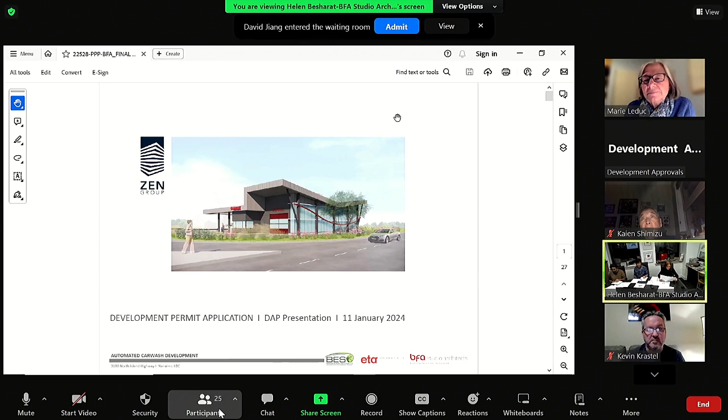Thank you. Could you share the screen, please? I'm going to start by introduction of our team. Chatan Manchatta is the development manager with Zen Group. Christiane Dufer is the landscape architect, she will be going through the landscaping concept. Jacob Pez is the civil engineer and site traffic management. Together with mechanical electrical consultants from BES, Ruben and David, and Nadine King and Christine Machin are with Watt Consulting, transportation engineers. Other than Christine and I, who are the presenters, other engineers and team members are here to answer any questions that the panel may have.

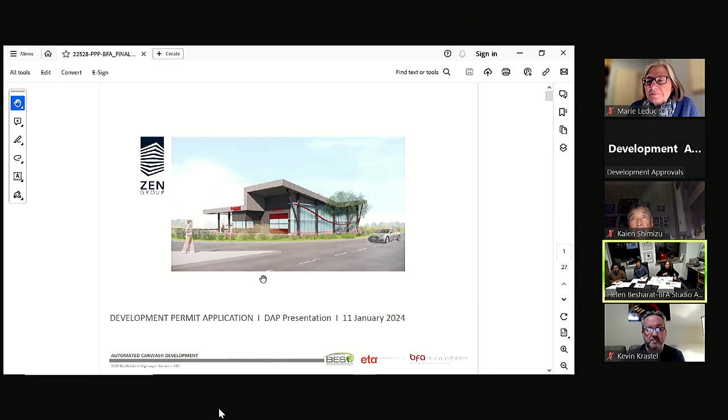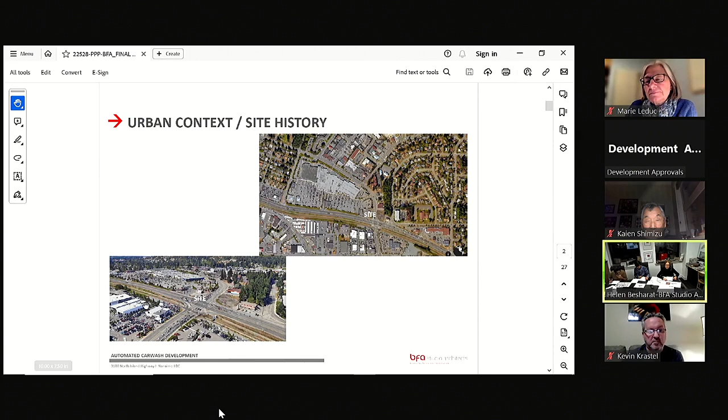Thank you for this opportunity, and thank you, Peyton, for your introduction. The site is located at the intersection of Island Highway and Norwell Drive, a visible site. You can see it now three-dimensionally. Right to the north is a large mall, and to the east and west, the site is surrounded by dominantly industrial buildings. This is from above, and this is the 3D. You can see the site, which is empty, and there used to be a gas station on this site many years ago that's since been demolished. You can see the existing industrial buildings to the south.

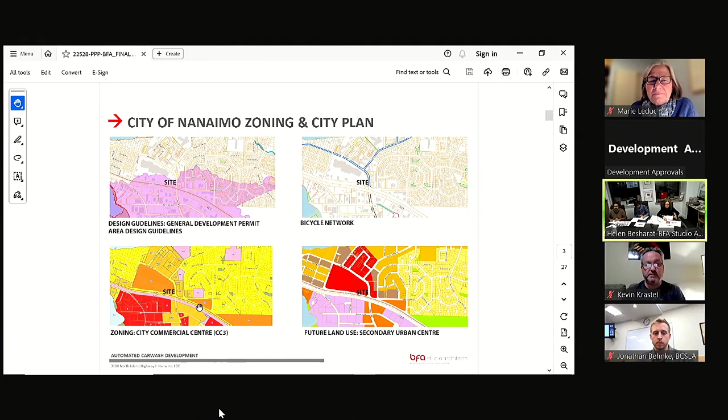As Peyton mentioned, the project is under development permit areas 4 and 8. It's zoned CC3, and the future land use is secondary urban center. You can see the site location indicated on these four images. Back to urban context, most of the surrounding buildings are industrial, except for the north, and to the south mostly car dealerships, and most of the time single story with a high ceiling or double story, two-story high.

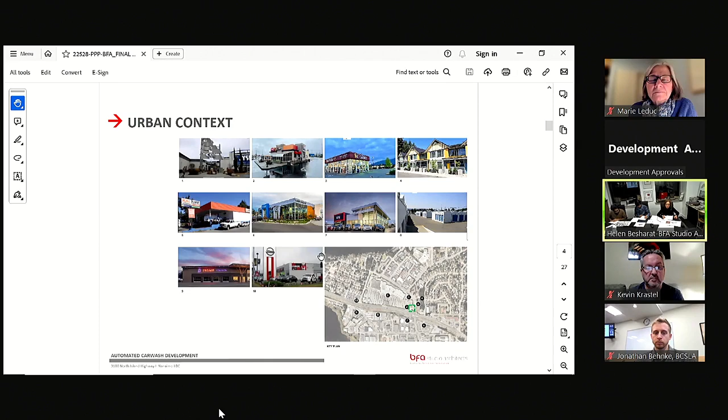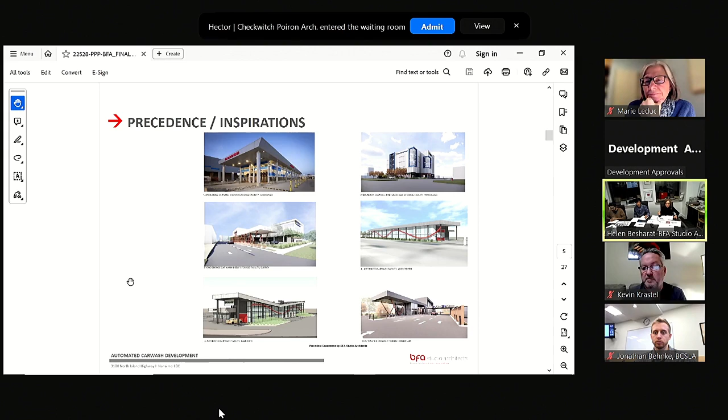The precedents and inspirations are actually from our industrial portfolio. We have been involved with industrial projects for the last 25 years, and the inspiration we have designed and learned from car wash projects, both urban and suburban and everything in between, trying to learn and improve.

The site is 1,444 square meters. The proposal is a 2-story building. The density is 362 square meters, 0.25. Allowed site coverage is 50%, but proposed site coverage is below allowed at 28%. And the use is industrial F3 occupancy based on BC Building Code.

With respect to the immediate west, the Dairy Queen shares 2 access points with the proposal. The vehicular access is from the northeast at Norwell Drive. You can see the green arrows, 2-way accessing the site. From Island Highway it's right in, right out. Again, the green arrows; orange indicates the circulation of

cars inside the site, which is cars will arrive at this point. There are 2 lanes; they arrive, they go through the pay station. After the pay station, the 2-lane merges to a single lane. The cars carry on, go through the tunnel, exit, and go up or down to get back to

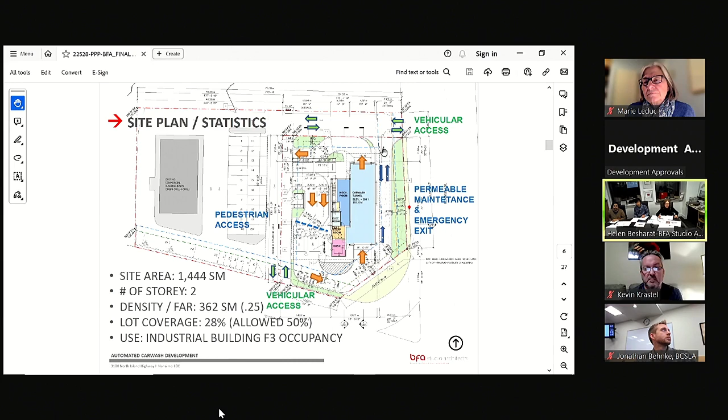We are providing tandem parking in this location. But because this area with permeable paving is usually empty, there is also a possibility for staff to park in this area.

We are proposing two variances. The first one is limited to the red triangle that you see in this area. The reason for that is we wanted to keep the continuity of the weather protection canopy at the entry to the car wash tunnel.

The second one: there is a requirement to provide about 5 to 6 feet of landscaping buffer. Rather than landscaping this area, we are providing a lot more landscape space on the MOT site, approved by Ministry of Transportation. So you can see we are providing almost 3 times more landscaping area, because we needed to keep this area open for maneuvering and ease of entry to the tunnel. We feel that because of this corner MOT site, the proposed 2 variances will have a positive impact on the proposal.

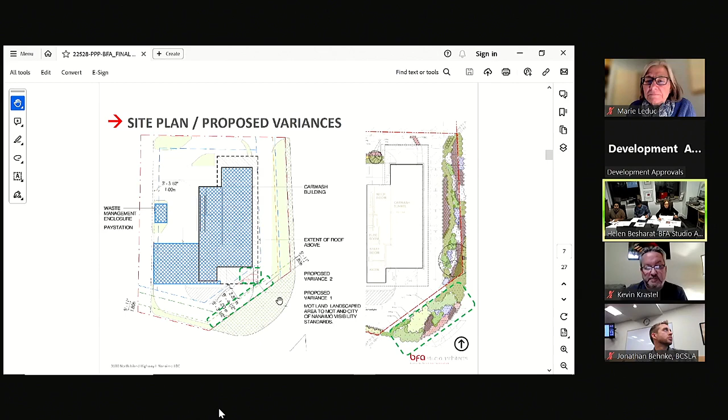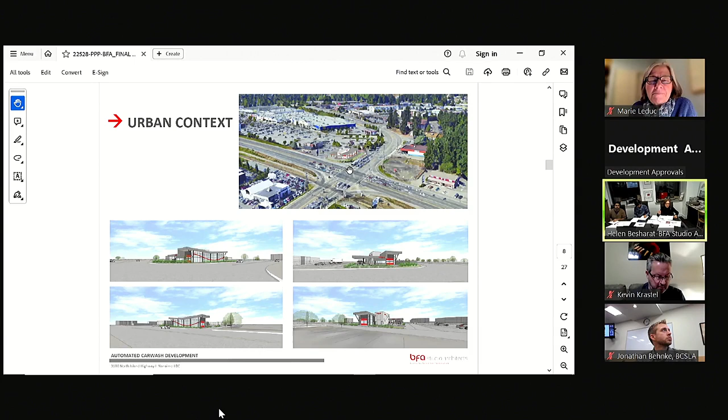Here we are showing the building 3-dimensionally in urban context. If you compare the building, you will see that it's an important site because it's at an intersection demanding special attention at the public realm. You can see that relative to other buildings around, it's a small volume, a small building.

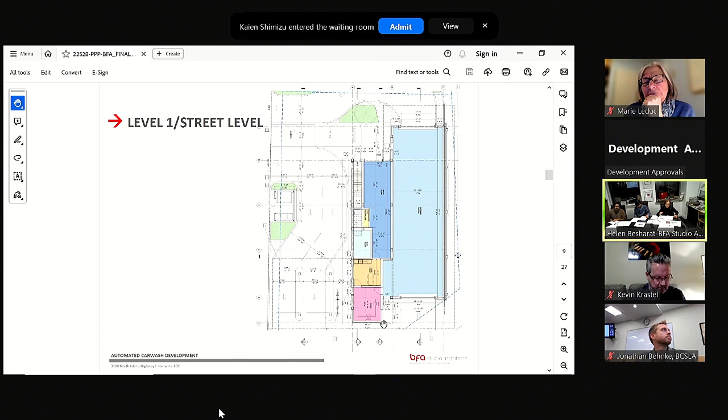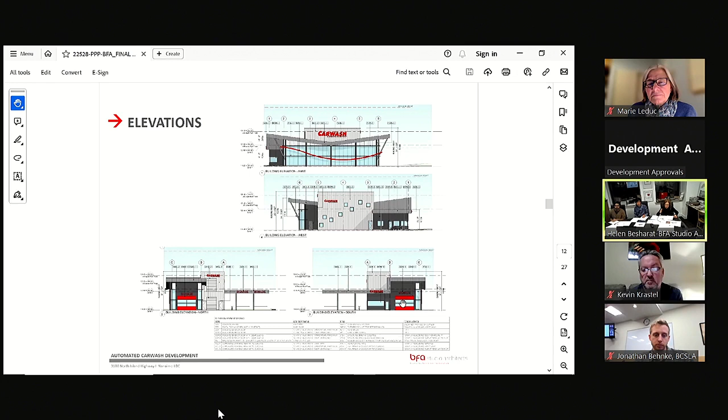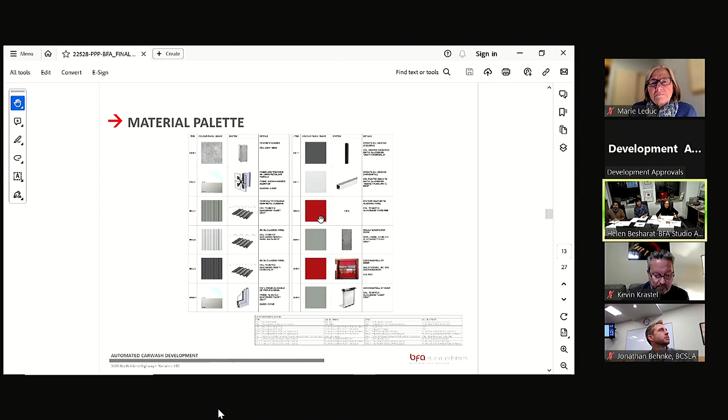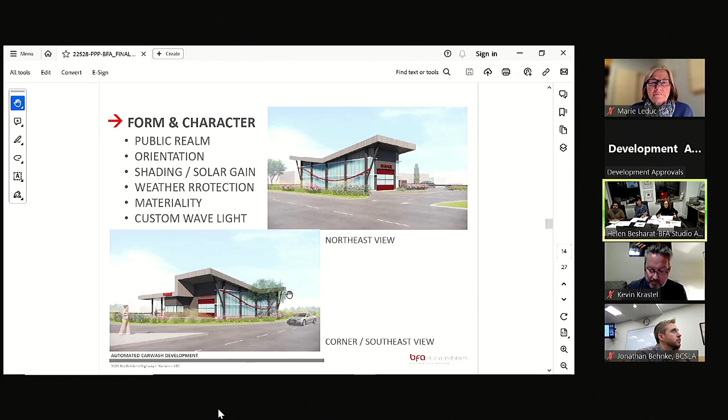And I went through the materiality, and we have also designed a custom wave with a custom light that's going to be lit at night. And it's kind of—it's a wave.

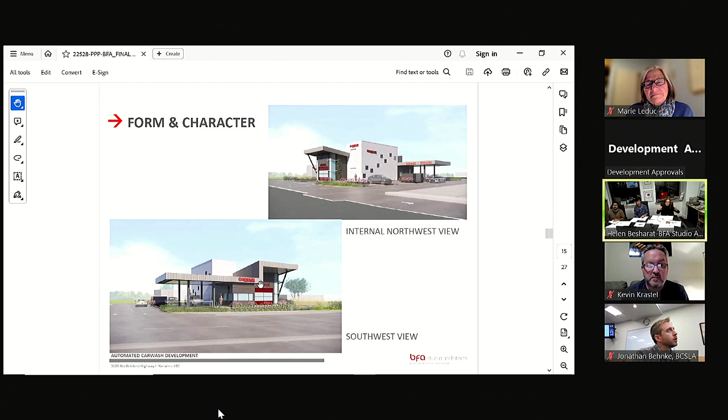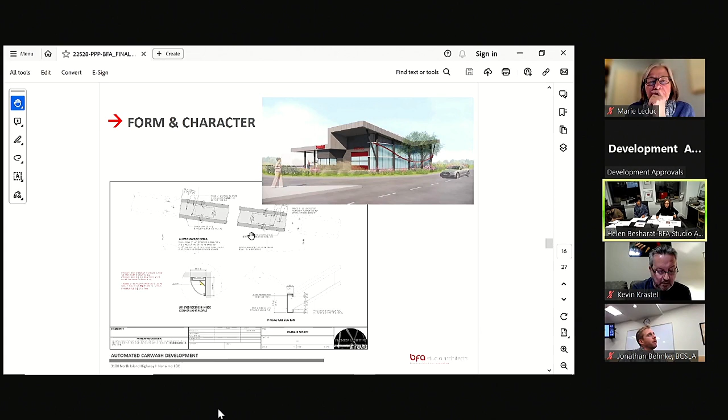The building has a number of sustainability aspects. The most important one is the use of recycled water rather than wasting untreated water at individual homes or businesses. The water gets recycled and reused.

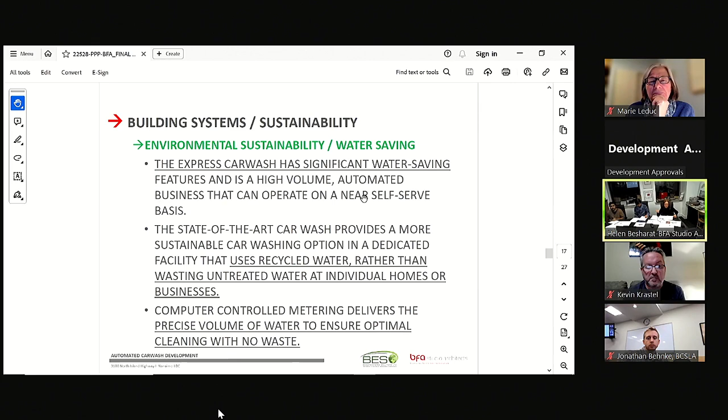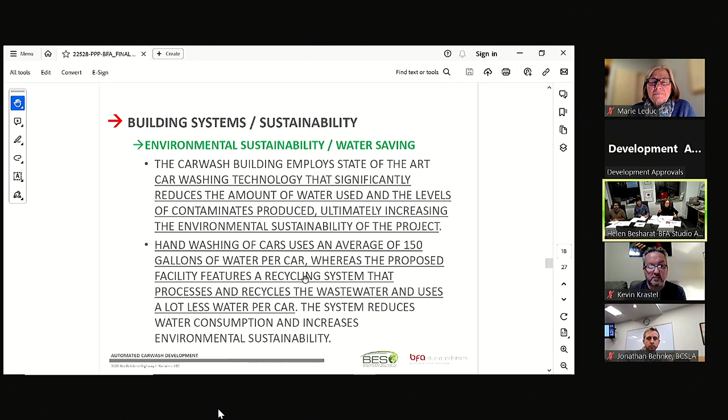The car wash building employs state-of-the-art car wash technology and significantly reduces the amount of water used and the levels of contaminants produced, ultimately increasing the environmental sustainability of the project. Hand washing takes 150 gallons; the use of water in this building is a lot less. Most of the water used in the car wash is reclaimed water, with only fresh water used during the last rinse to avoid any drying spots.

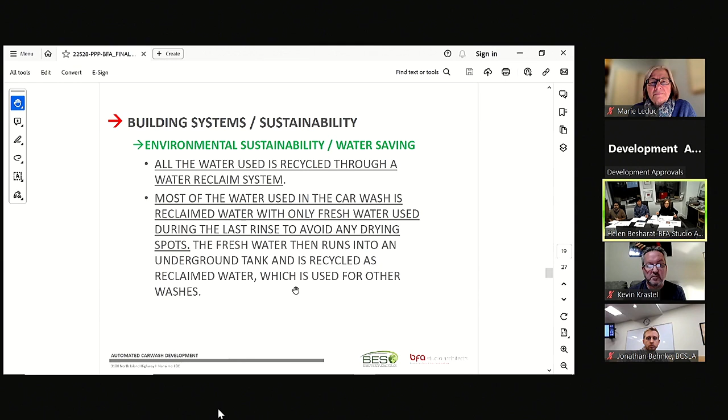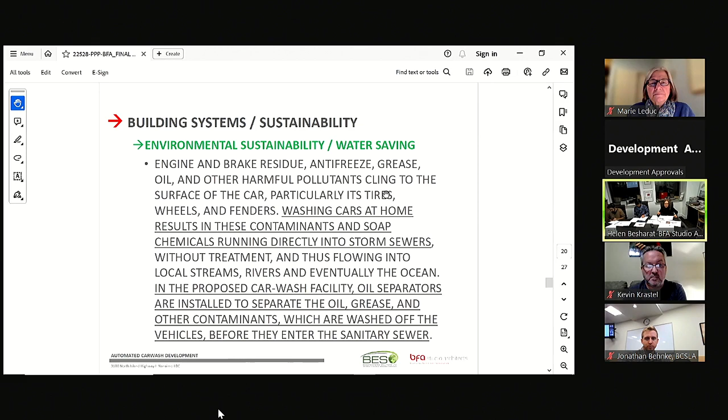Another environmental aspect of the project is that the car wash facility's oil separators are installed to separate the oil, grease, and other contaminants which are washed off the vehicle before they enter the sewer system.

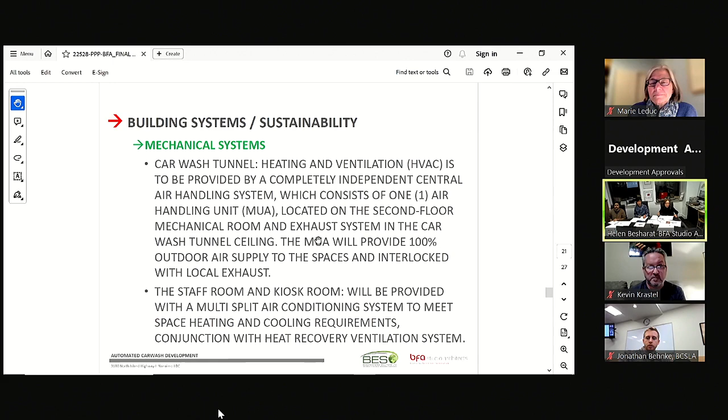I'm not going to go through the details of mechanical and electrical sustainability — they are mainstream. The biggest items are separating the oils and also the use of water, which are the highlights of sustainability. BES, our mechanical and electrical engineer, has prepared detailed information on every room, and they are present if you have any questions — they will be here to answer them.

LED lighting fixtures are used. Occupancy sensors are used where permitted, and the infrastructure for the EV charging stations will be installed in both parking stalls.

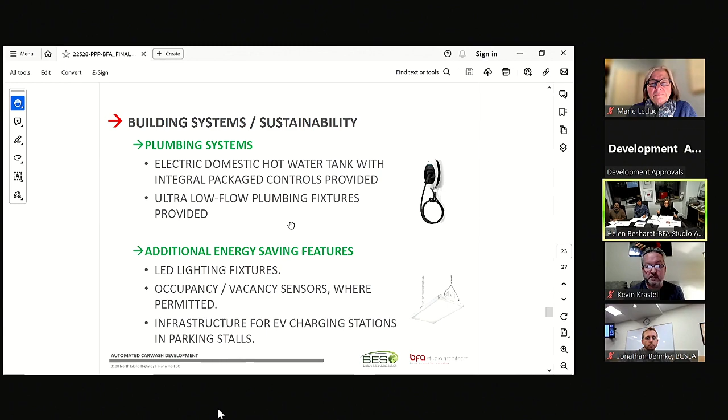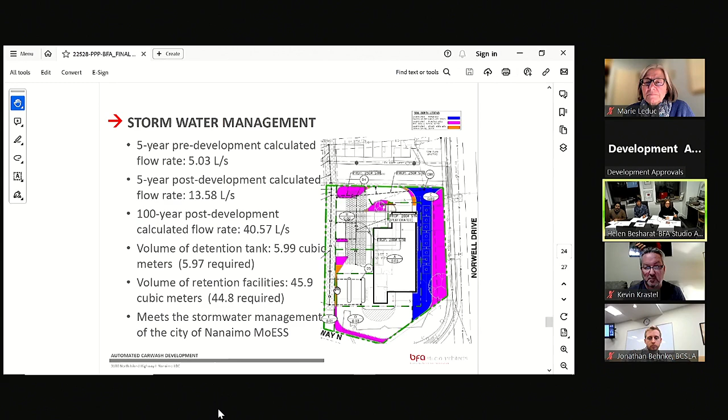This is a stormwater management drawing prepared by Jacob Pence of Appleton Martin. The magenta color is landscaping with approximately 450 millimeters of soil. Dark blue is permeable paving. There is also some stormwater underground tanks in this area, and the small amount of orange is gravel.

With this, I'm going to ask our landscape architect, Jonathan Behnke, to carry on with the landscape presentation. Thank you, Helen. I'll just ask you when I need to go to the next slide — there's only two, so it should be pretty easy. The landscape design is pretty straightforward.

I think Helen did a really good job of covering all the sustainability initiatives we're trying to achieve. With the landscape, we want to maximize the permeable area on the site while also providing a strong green buffer between the street and what is visible, to shield the appearance of the cars while still allowing the building to be highlighted. In this plan, you can see that large buffer between the drive aisle and the offsite area, as well as the offsite area we're hoping to plant — see the sections for how wide those planted areas are.

The hatched space on site, as Helen mentioned, will be permeable paving, bringing in more porous spaces for stormwater throughout the whole site. Areas that aren't feasible to plant, whether too skinny or undercover, will be permeable gravel so it's not just a solid hard surface. I think we can go to the next sheet now.

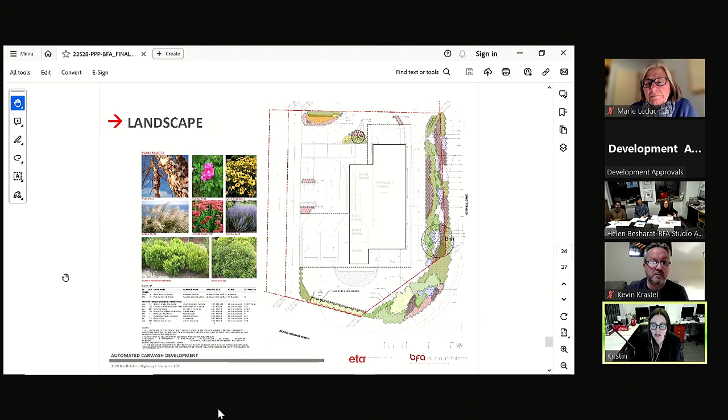For the planting, we want it to be lush, native adapted plants, as low maintenance as possible while giving a lot of variety and visual interest. That includes year-round interest, making sure we have a good mix of evergreen species so there's always a bit of visual screening between the street and the cars coming around the internal drive aisle.

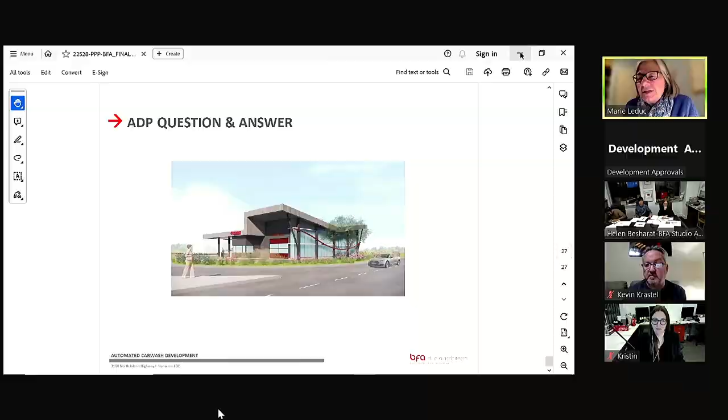So maybe we'll start with that. We've seen this project before, actually. A previous project was proposed for this property. Kevin, I think you were probably part of that panel, so maybe I'll let you start off here and see what your thoughts are. Sure, thank you, Madam Chair, and thank you to the applicant for the presentation. A very nice presentation. We definitely saw a previous application a few years ago for this project. I really liked the previous project.

It was very modern, very futuristic, the form and character. But I think I like this project even more than that one. Curious.

There's a second floor, Helen. That's correct. Is it going to be just used for storage or office or what? The previous application had a residential unit up there. We didn't think it's appropriate to have a residential unit with a car wash and noise and everything else. That's completely eliminated. The upper floor is limited to service areas and what's needed by gravity to serve the car wash. Okay, that's good.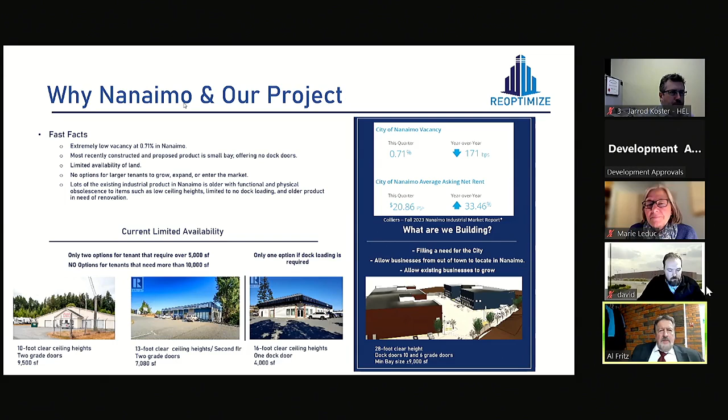I think, Al, you're muted still. Yeah, I don't think I have control of it. Am I on now? Can you hear me now? Yeah, you're on now. Oh, okay, I wasn't in control of that.

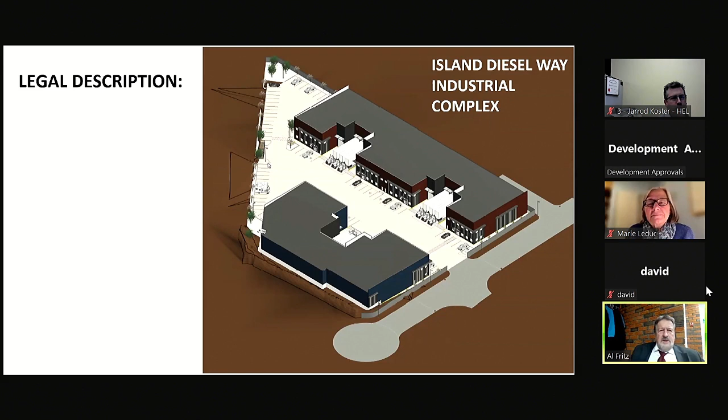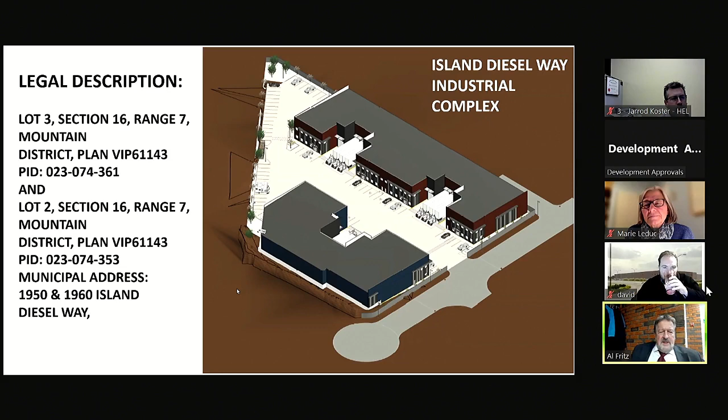Thank you very much, Madam Chair and members of the board, and great start there, Jarrod and David. Our legal description will be on the slide, so won't take much time to go through that. Probably the municipal address is more important, 1950 and 1960 Island Diesel Way. Just to orient you, north is to the top of this page. You can see the address there at the green arrow, and then we've zoomed in a little bit to give you a clear indication of the location of the site.

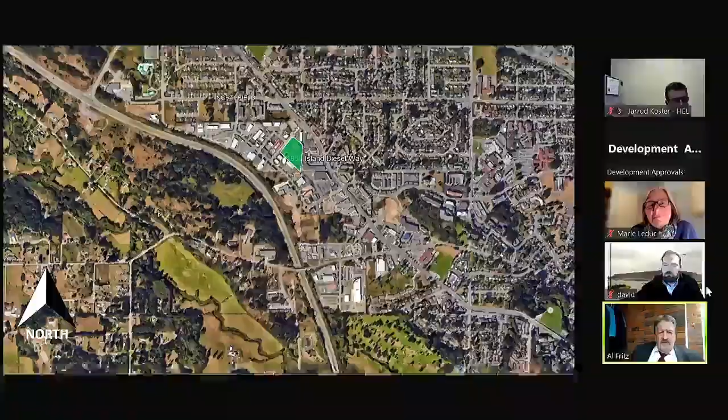Just note that we've taken a new vantage point, north has drifted to the bottom just for clarity. The previous slide had north to the top, this one to the bottom, just to give orientation and let you see it.

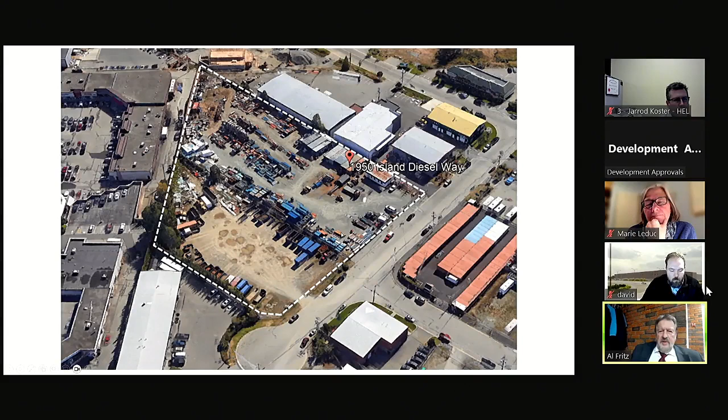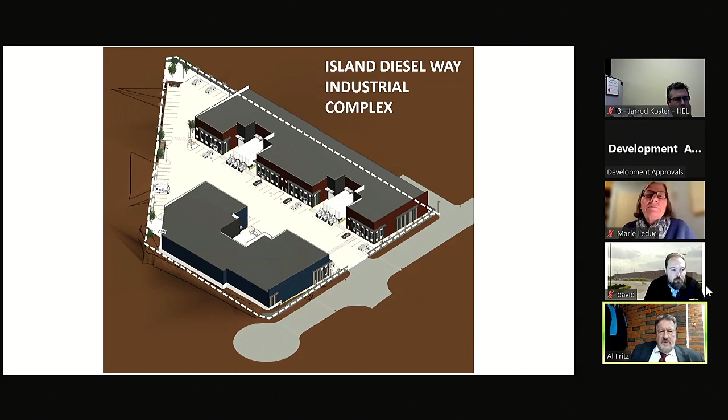Now I've taken an aerial rendering and provided an outline that has the same orientation as the site. You can see this is a little bit of an earlier photograph. The site has been cleared of all the sea cans and has been stripped, which gives you an indication of the end result relative to what is there currently. Again, a different point, just another look at the site.

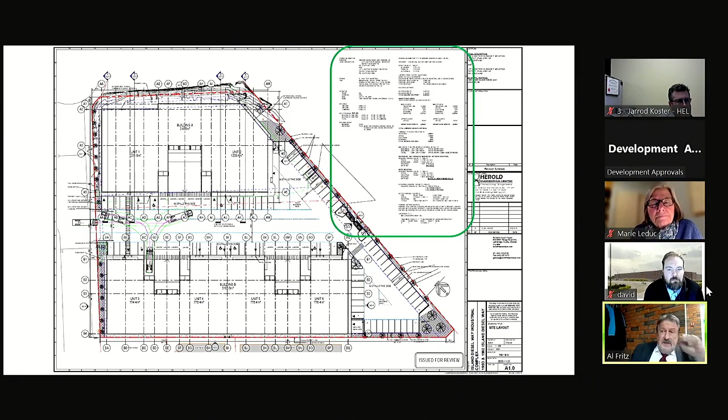Finally, an orientation that will help us understand it relative to the orientation of the site plan I'm about to show you. North is going to be just a little off to the left, and there's the north arrow to help orient you. I'd like to zoom in on the information here on the upper right. This gives us a site plan, and hopefully by the time I've walked you through it there'll be good clarity. We'll carry on to the next slide.

We've got I3 high-tech industrial warehouse permitted in I3 zoning as per the table provided. We've got setbacks being honored throughout, so we're not anticipating any variances.

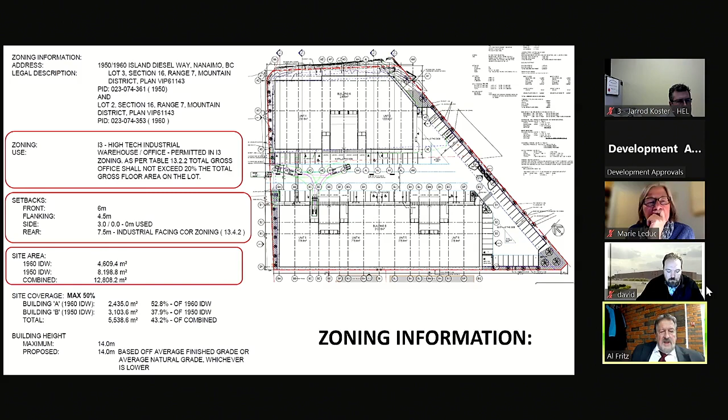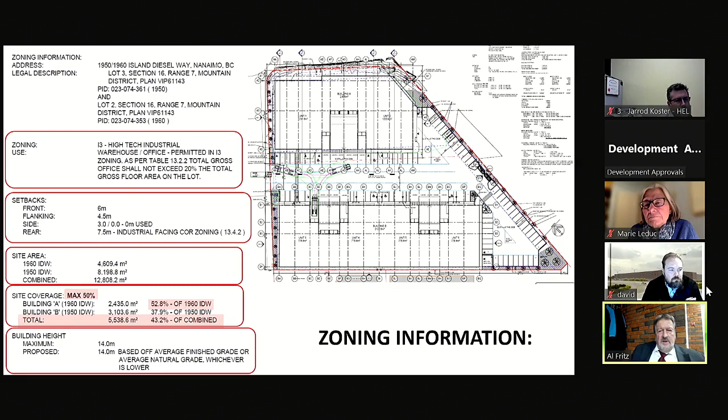The site area goes up here. The combined site area is 12,808 meters squared. Our coverage is to be at 50% maximum. We're coming in with a total of 43.2% combined. I do want to point out that building A is ever so slightly over 52.8, however, the combined total is at 43.2, so we're well under when we contemplate both sites together.

The parking is all as per the sizes. The loading docks, loading areas, there's 16, 6 of them are recessed. Our building area is 5,530 meters squared. You can see the sum total there, the total gross floor area.

6,004 meters squared. The maximum on the lot is to be 20% maximum, and you can see we're at 19.6% of the office space. We've got not mixed use, warehouse.

We are requiring 77 parking stalls, we have a total of 84. Mixed industrial would have a deficiency relative to parking, 15 more would be required, so we're working with the warehouse-only considerations.

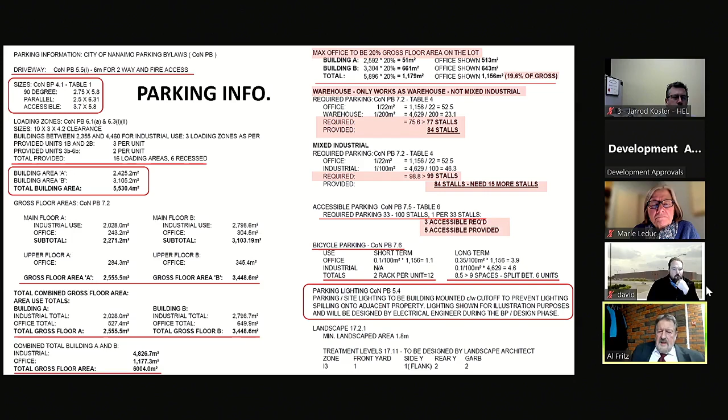Parking required is 3 accessible, 5 are provided. We have bicycle parking, you can see there we have 2 racks and we have 9 spaces split between them. Parking lighting will be engineered, and we do have care to respond on the landscaping, so that will come yet.

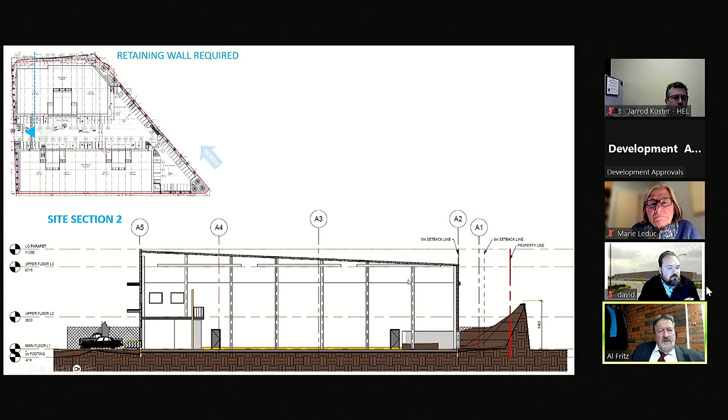Now you'll notice a little section line here that gives us an indication of the building section. I'll draw your attention to the toe of the slope, the berm on the end of it, which will require a retaining wall. Section 2, you can see again we have a bit of an anomaly with regards to grade, and that is the purpose of these diagrams. So we've got 4 sections for you there to get an indication.

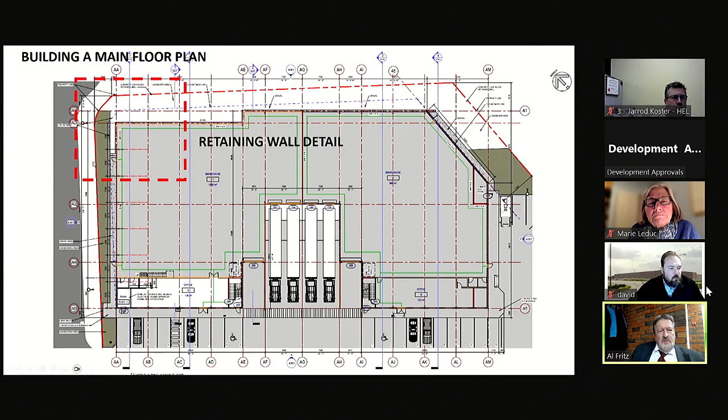I'd like to just take a real quick look at this corner of the site. You can see that we are going to have a retaining wall that will allow us to go into the base of the escarpment like that, and that should be very effectively managed.

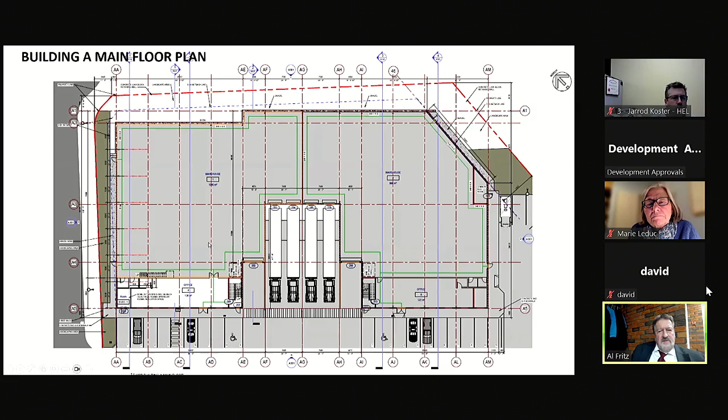This is the main building floor plan for building A. The interiors are yet to be fully developed as tenancies step to the plate.

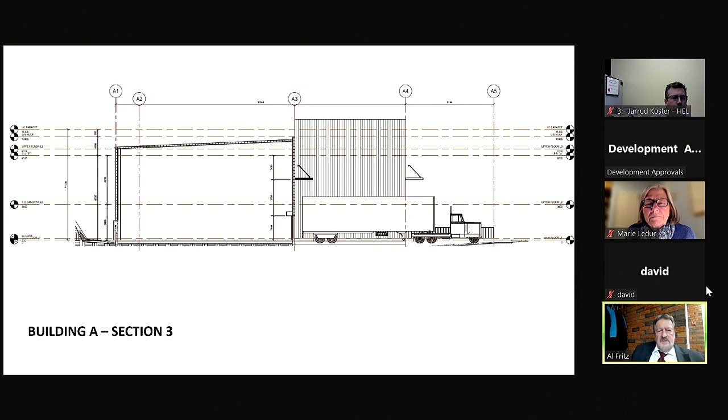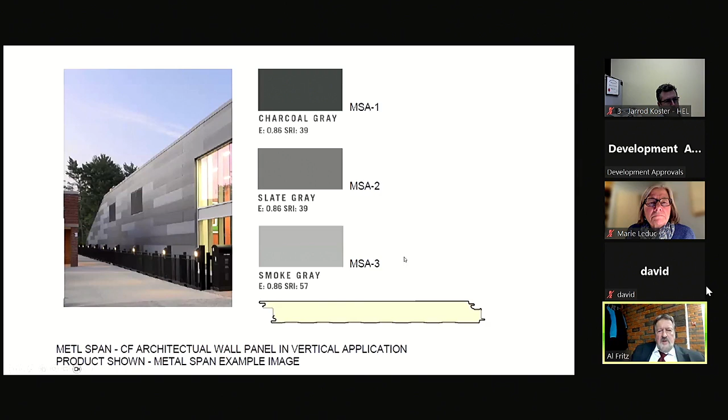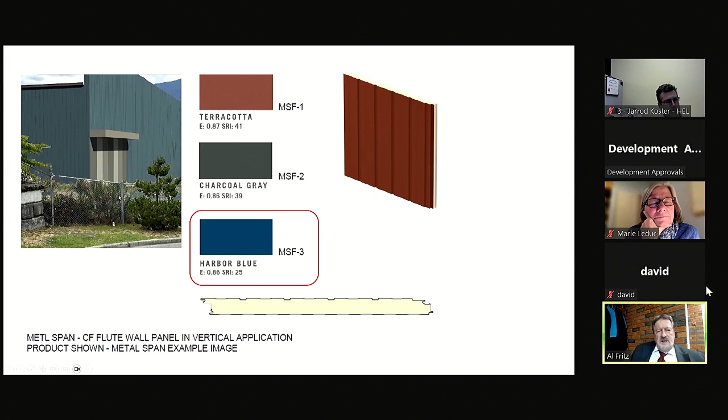Main elevation, this is our blue building, if you will. We'll talk about the harbor blue color of it. We've got some charcoal gray, some slate gray, and this harbor blue for the building that will be on the facade. This is an excerpt from our rendering that we will show you in a minute.

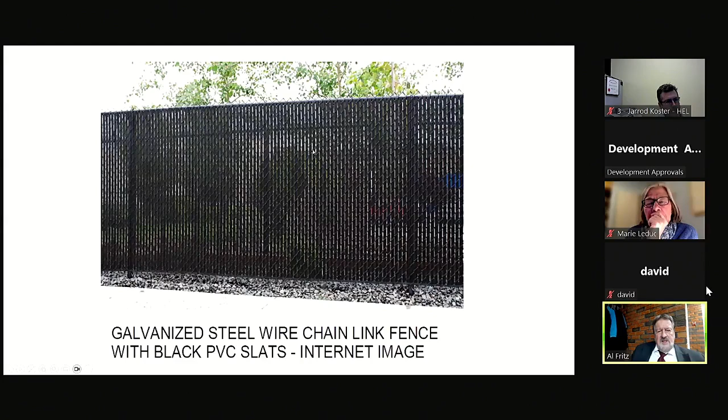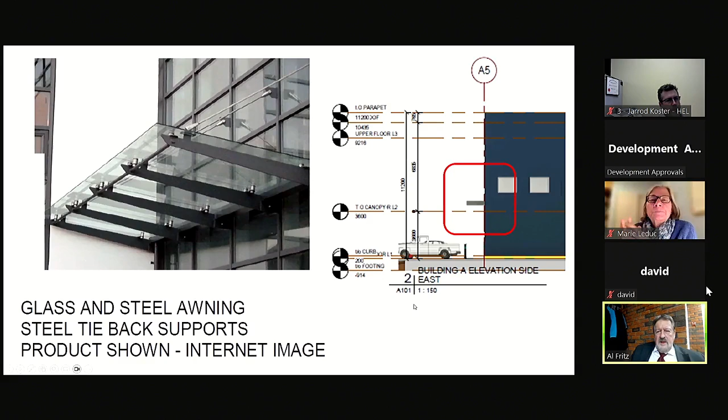And then a regal gray roof, our garbage enclosure will be as such, and our chain link fencing will actually have black PVC slats, which will make it look attractive. We have some soffit areas, a timber soffit, creating a good aesthetic appeal, as well as glass and steel awnings, which you can see will appear on the building set, both of them as such.

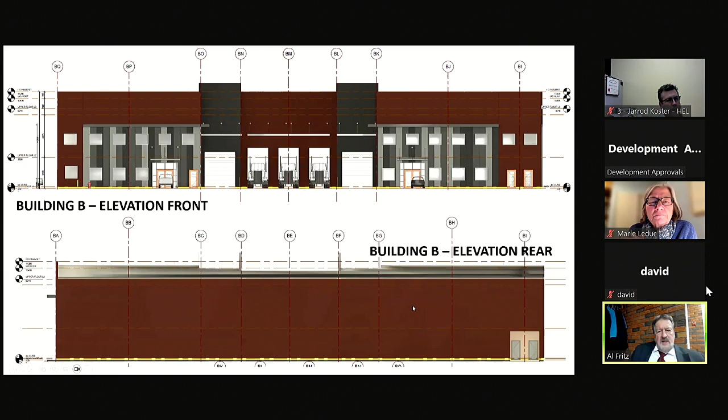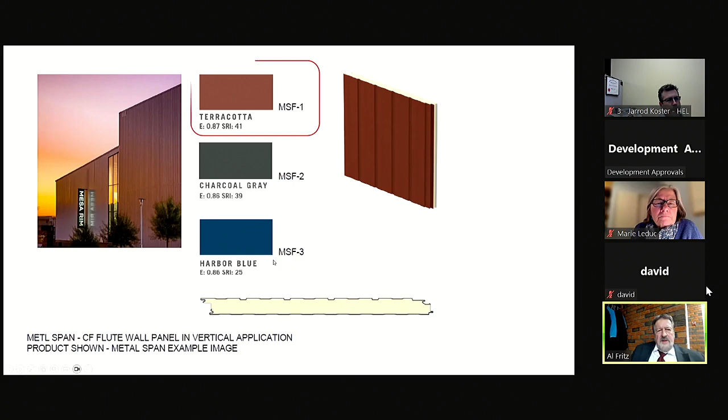So the second building will have one building harbor blue, the other building in this terracotta, the predominant color of building B, and the glass awnings, which will add a distinct element of elegance to the building.

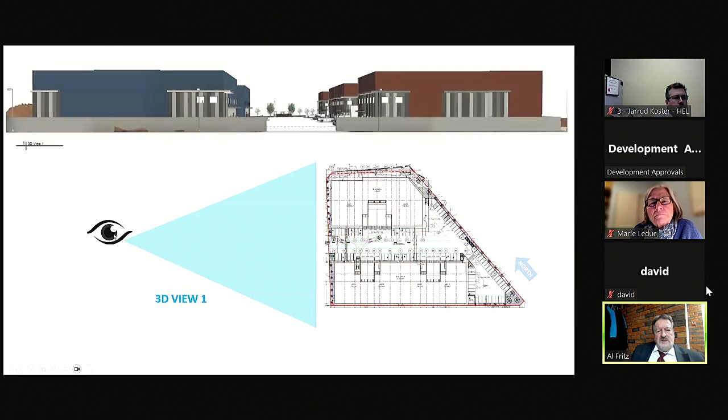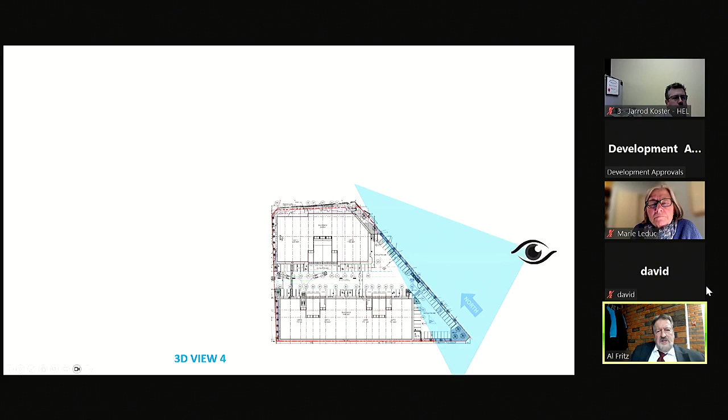These are the view angles now. So the eye shows the direction that we're looking at the building from, and then all of these respective views in turn give you a good indication of the geometry of the buildings and how they will look on the site.

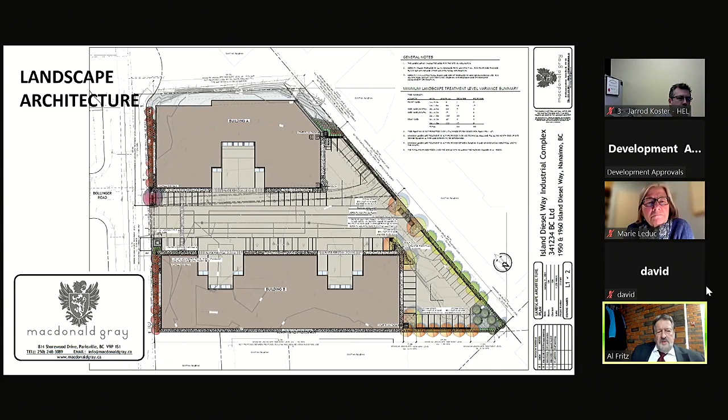Thank you, everyone. So overall, the planting plan is basic. It's obviously a building-oriented site, but overall, the planting plan focuses on the minimum landscape treatment levels for the perimeter of the site where space is available. The minimum landscape treatment level is not proposed along the north property line, where geotechnical constraints will dictate the best solution to the slope interface with the neighboring property.

Jarrod can probably speak to that a little bit more after, if there's any questions. Tree planting is also not permitted over the city-owned storm sewer right-of-way to the northeast of the site. And of course, our landscape variance, where building B is situated directly adjacent to the neighboring buildings to the south, does not have a landscape buffer. To offset these areas, we've proposed dense tree planting at 4.5 and 6 meters on center in all available landscape areas, as you can see on the plan there.

With regards to the site, we have provided sidewalks and pedestrian crossings around both buildings. There's staff amenity picnic tables proposed to the northeast behind building A and to the southeast behind building B, out of the way of semi and vehicular traffic.

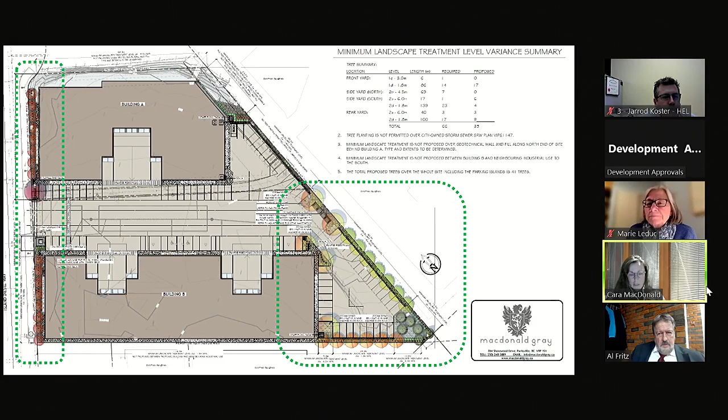2 bike racks are located at the front of buildings A and B. 2 benches are proposed on the east side of building A and in the parking island on the northeast corner of building B. Parking lot lighting is also provided and has been designed by the project electrical engineer, who is not here tonight. At the city's request, consideration for additional planted parking islands and outdoor seating adjacent to the main entrances will be made after revisiting the parking layout and excess parking stalls that were discussed earlier.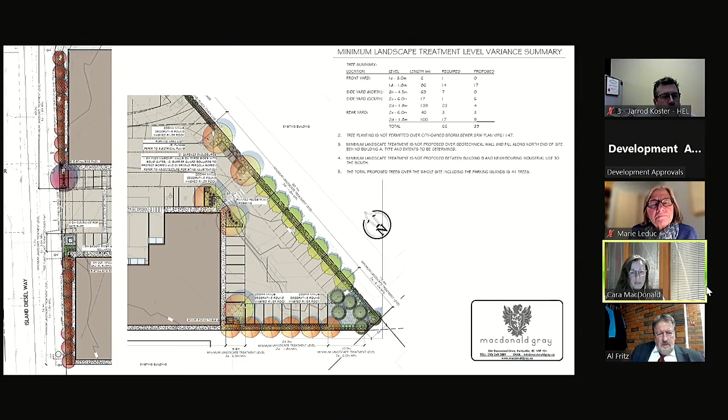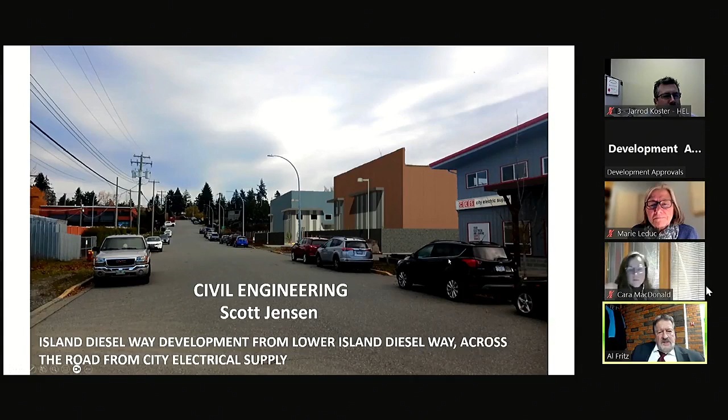Hear you well. Okay, so as far as servicing the site goes, it's fairly straightforward. There's 2 buildings on the site, but the overall site is considered as one property from a servicing perspective. Down in the bottom left corner, the blue there's an existing water service stub that will take a water service off of there and then sub-feed the second building via that.

Similar with the sanitary sewer shown in brown there, about halfway up the page. Again, single service to the site, split to service both buildings. And then lastly, storm - as was mentioned before, there's an existing city storm sewer that runs through the property that services the upstream lands. We're going to be installing our own site stormwater system. You can see there's a tank for retention and detention of stormwater before connecting to a new service for this site, to a sewer on Island Diesel Way.

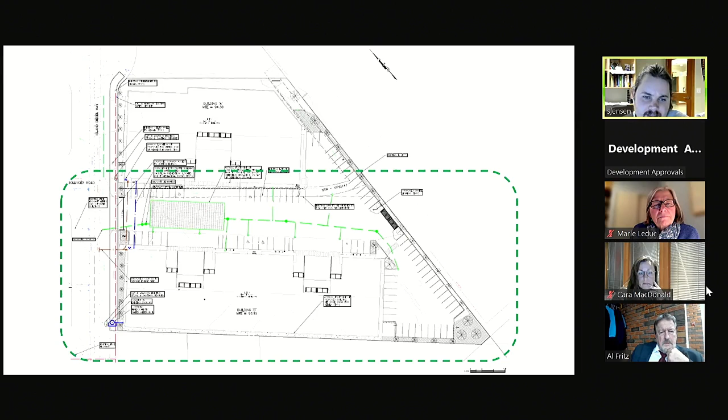All right, so I think that's about it for servicing. If you want to maybe go to this one here.

Here you can see we've shown some general truck movements with that larger 53-foot truck that we mentioned off the top. These are just some typical movements showing that there's flexibility on the site for various maneuvers to get the trucks where they need to go, showing entering both from Island Diesel Way and exiting onto Island Diesel Way, as well as an alternate access coming off of Bollinger there. It's more tight, but the vehicles can make it either way.

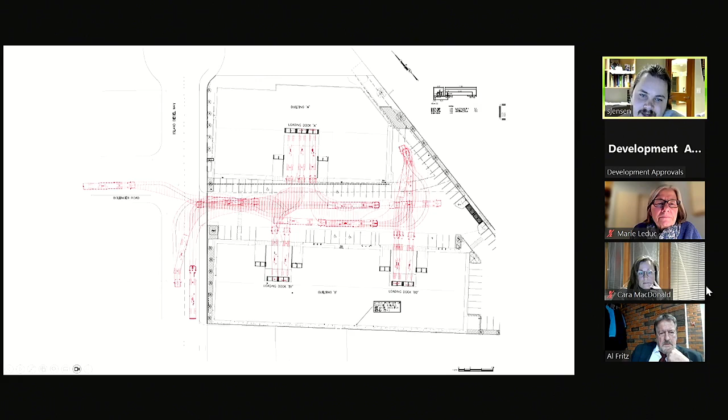As far as pedestrian access to the site goes, there's not much in the way of sidewalks on Island Diesel Way or Boxwood. There are some disjointed sidewalks, but nothing leading to the property. We've talked with development engineering, and frontage works are likely. You can see in gray along the frontage an asphalt multi-use trail along Island Diesel, behind the existing curb, connecting up to the north.

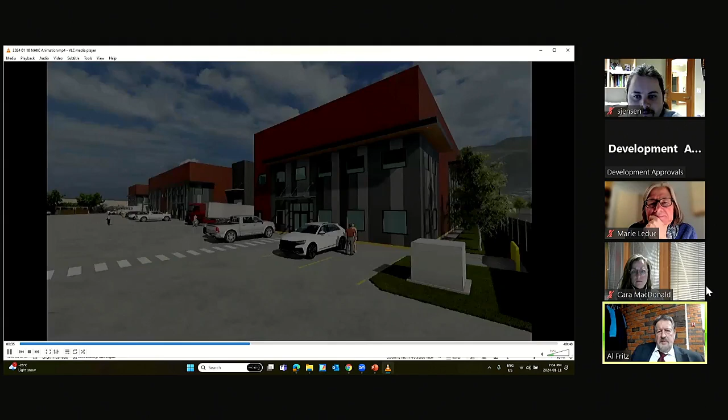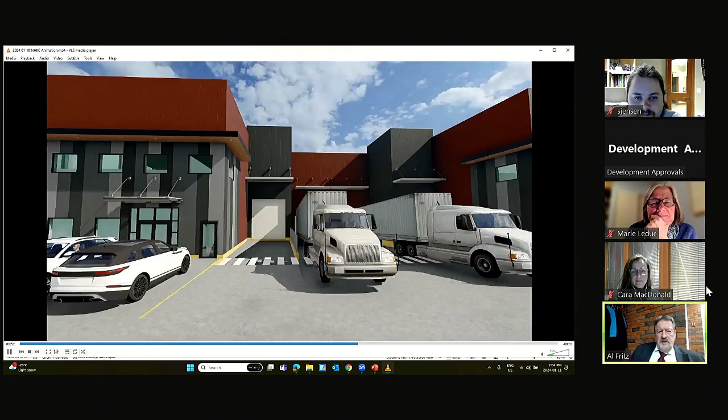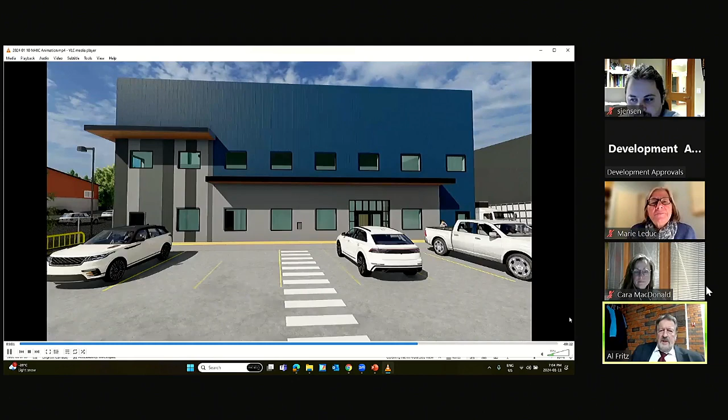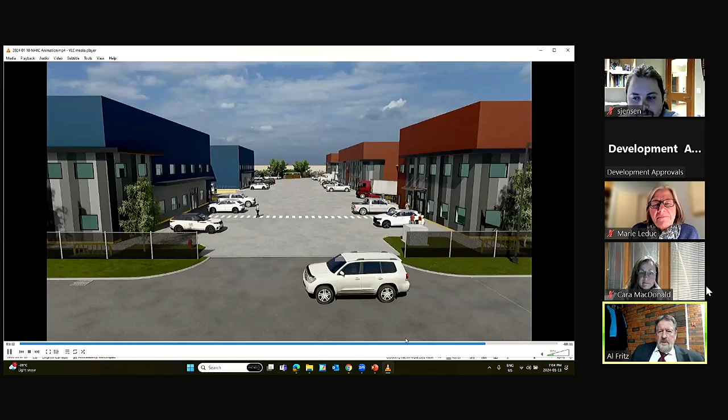I think it turns out a fairly good solution relative to the context that exists on site. You can see some of the a little more aged context that's nearby.